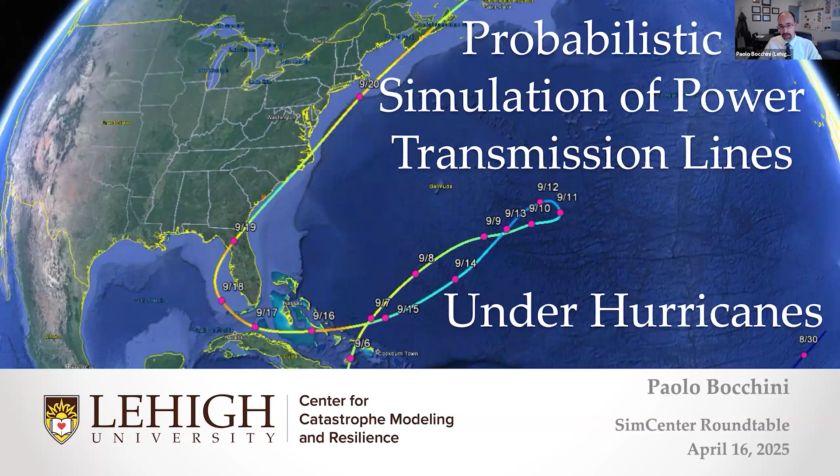Here, I try to combine some messages, like if we were giving a lecture, but condense it in 15 minutes. So I'll do my best, and I'll be a little superficial because I want mostly to go over some concepts than specific methodologies. So these are the main topics I want to cover today.

And I like to show this slide that gives a general idea of the approach that we have had for almost 10 years at this point, when we developed fragility and vulnerability models for this type of lifelines. The most important thing and the most important challenge, in my opinion, is to understand how you need to span a very large range of scales. For some of the structures involved in these problems, the bolted connections are really governing the dynamic behavior and need to be captured well.

So you need to start your study by looking at things that are in the scale of millimeters, a fraction of an inch, and then work your way up, always carrying all the important information with you and dropping everything that is not as relevant, all the way to studying the functionality of these systems that really makes sense when you have a model that spans hundreds of kilometers or hundreds of miles. So there are something like 8 orders of magnitude that you have to span in these models, as well as really different disciplines. You have to go from continuum mechanics to structural mechanics to system fragility analysis, and finally power system analysis.

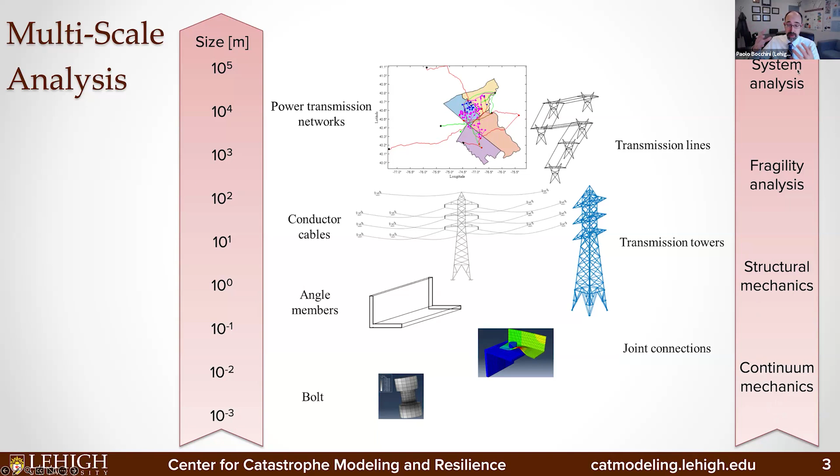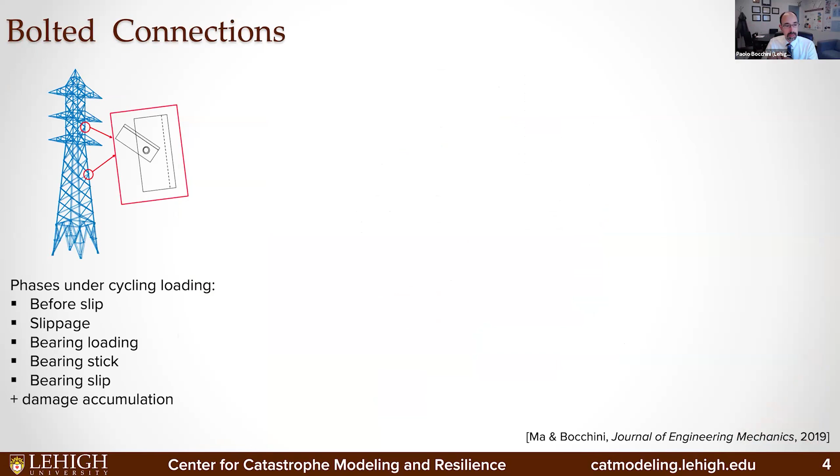So some examples, I like to start with our work on lattice steel towers. One of the big challenges, as I said, is to capture well the behavior of these bolted connections. And we had to work starting from experimental data to create 3-dimensional finite element models that could well represent the static and dynamic behavior of these bolts, and then go from those finite element models to simplified analytical models that we could eventually embed in an OpenSees element and put it into our tower models.

To tell you something funny, we had absolutely no idea that we had to do this when we started working on these towers. Our plan was to go directly to the tower model, and we realized that to really capture this, we had to start with this entire preliminary work that took something like 1 year.

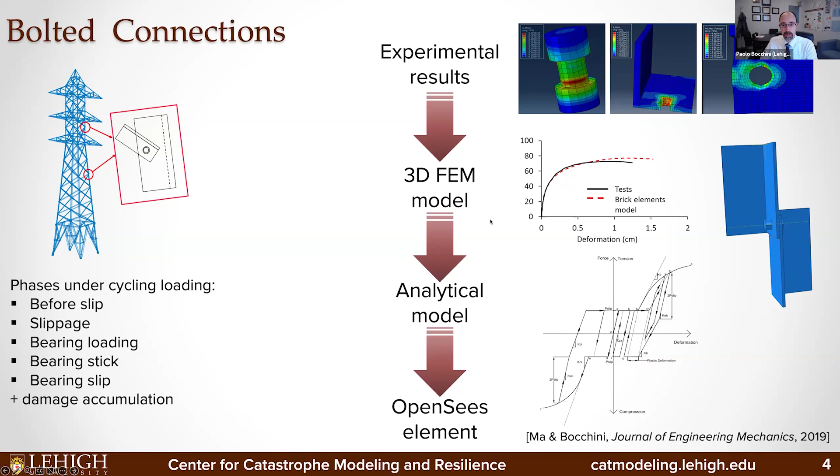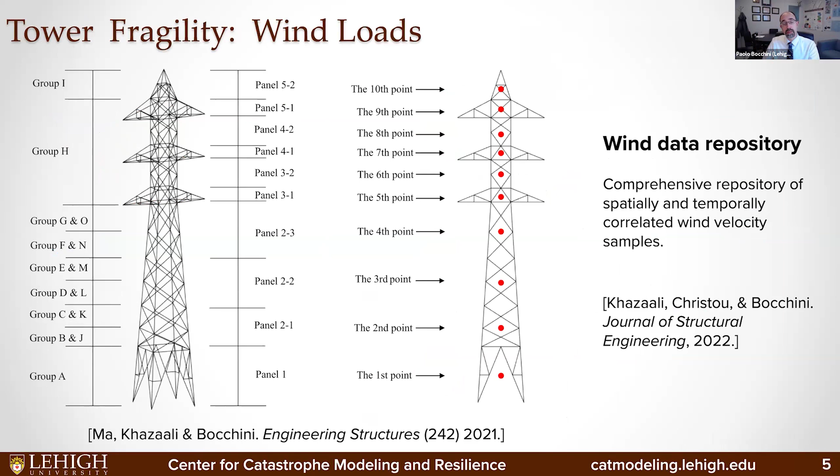Once you have the tower model, you need to apply your loads, and other students in our team had worked on the development of wind load time histories correlated along the height of tall, slender structures, and so we could leverage that work and apply direct wind loads to our towers. But then another issue arises, and it's what happens with the load transferred by the conductor cables. Of course, we could simulate all the loads applied to each point along the conductor cables, but that would generate an incredibly complex correlated set of loads that was really impractical to handle.

So instead of using this naive approach, we decided to study what happens if we could, in a way, linearize the problem. And of course, the idea of linearizing the dynamic of these cables seemed crazy at the beginning. But if we could linearize it and use modal superposition, then we could really calibrate a spectrum for the reactions of the cables to the attach points at the towers. And it turns out that if you choose the right point around which you do the linearization, you can actually do this with very, very high accuracy. So do first a preliminary mapping to a more convenient state, and then do the linearization.

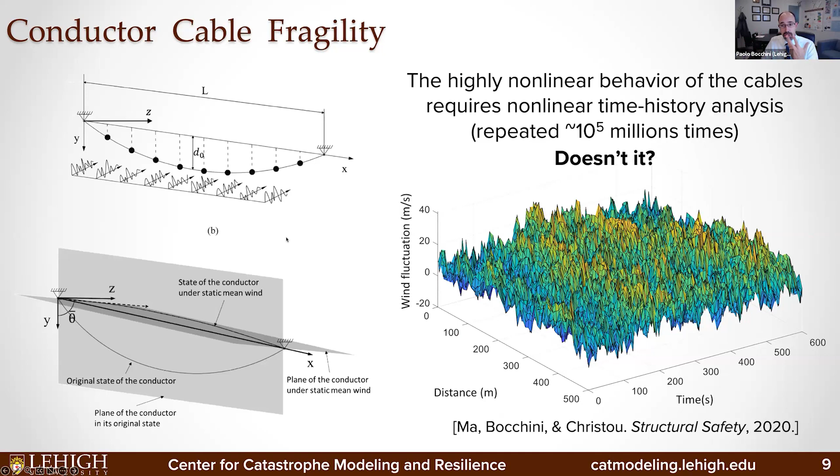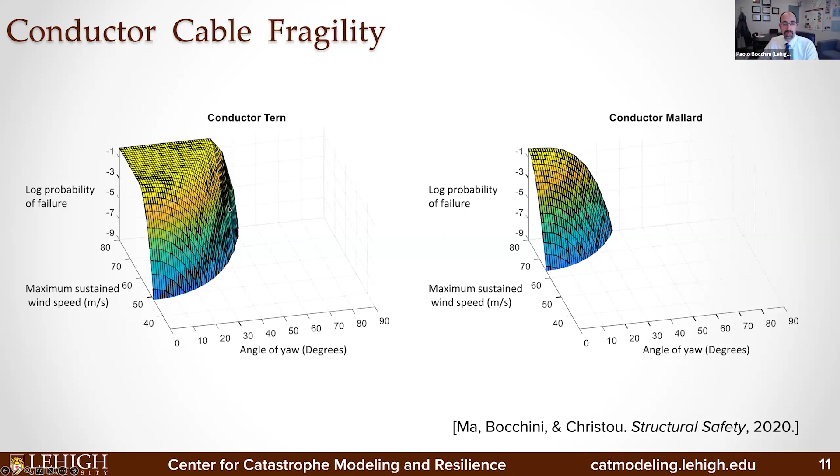Similar issues apply when you want to compute the fragility of the cables, for example. And again, here we wanted to check if it was possible to linearize this problem, and we figured that if you do it around a condition where the cable is already loaded by the mean wind, then the stiffness of the cable doesn't change very much. And so you can use a sort of modal superposition approach and still get very good results. So with that, we ended up with fragilities for the towers, fragilities for the cable as a function of the wind velocity and as a function of the angle of attack of the wind.

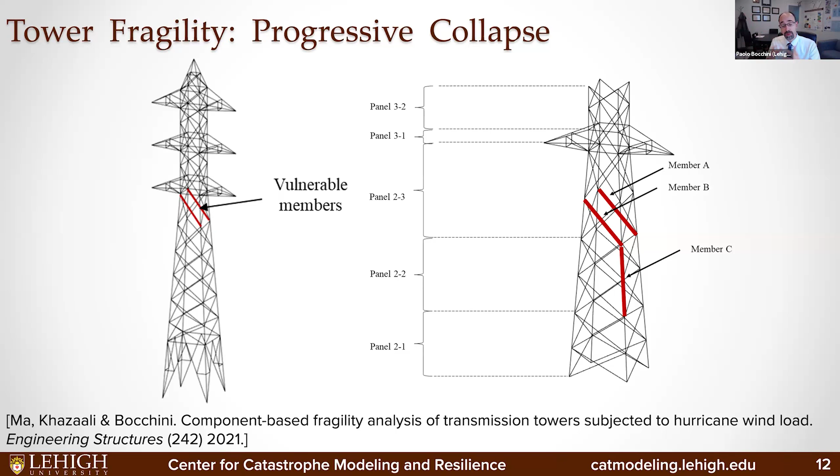For the towers, one element that is often neglected is to select the right engineering demand parameters to consider. The most common approach in this case is to study the tip displacement as a metric of the global behavior of these structures. But in reality, the failure of these structures is not really governed by their global behavior, but more by specific local buckling of some of these elements. So we quickly realized that we couldn't get good results just looking at the global deformation. We had to look at specific levels of stress in each element and then do a sort of progressive collapse analysis to study the fragility of these towers.

We also looked into transmission monopoles, so other types of transmission line support structures. We started by calibrating fragilities using the most common approaches in the literature that are based on the assumption that the highest bending moment occurs at the base of these structures. And so you can do effectively a static equivalent analysis, compute the capacity of these poles at the base, and apply the equivalent bending moment coming from the hurricane wind. And we ended up computing fragilities with these assumptions for different classes of these poles, etc.

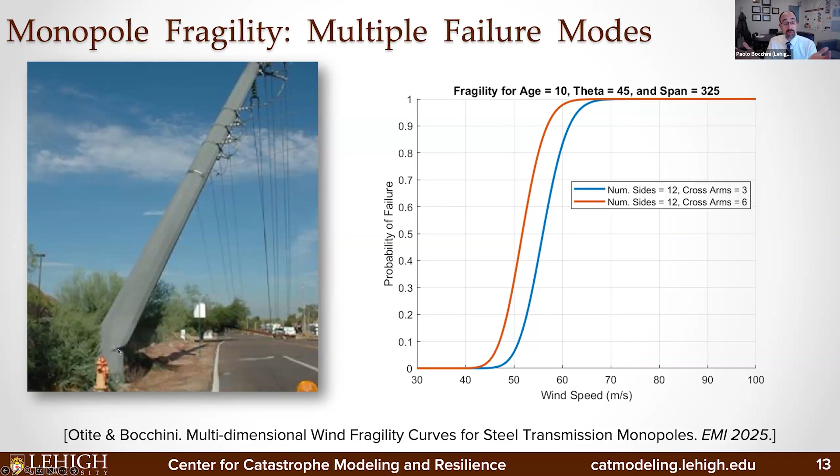But then we noticed that the assumption that I just mentioned of failure at the base works very well for distribution poles, but it doesn't work as well when you're dealing with bigger structures used in the transmission lines. Unfortunately, there are a lot of failures, probably more than those occurring at the base, that happen midway through the height of the tower. And as many of you perhaps have already guessed, this is due to the fact that the second mode of vibration tends to excite and generate bending moments that are higher around the middle of the height of the tower. And especially considering the fact that they are typically tapered and there are additional connections that can exacerbate the loads at some locations, these end up being the most critical cross sections. And so we're creating now a new set of fragilities that includes also these possible types of failures.

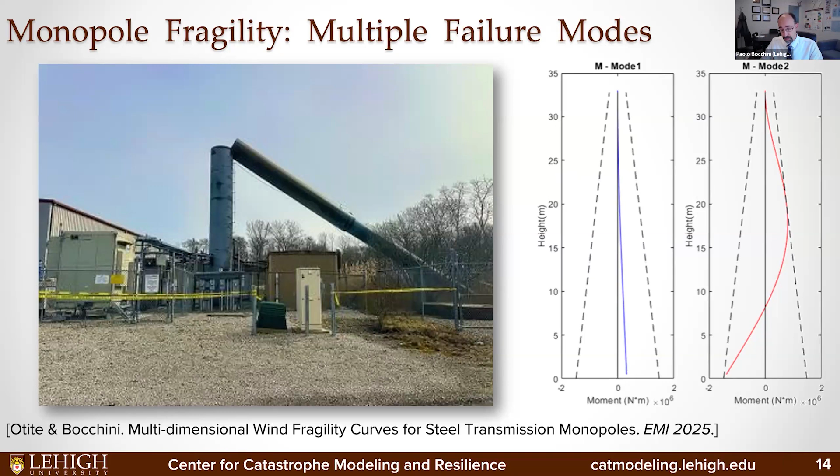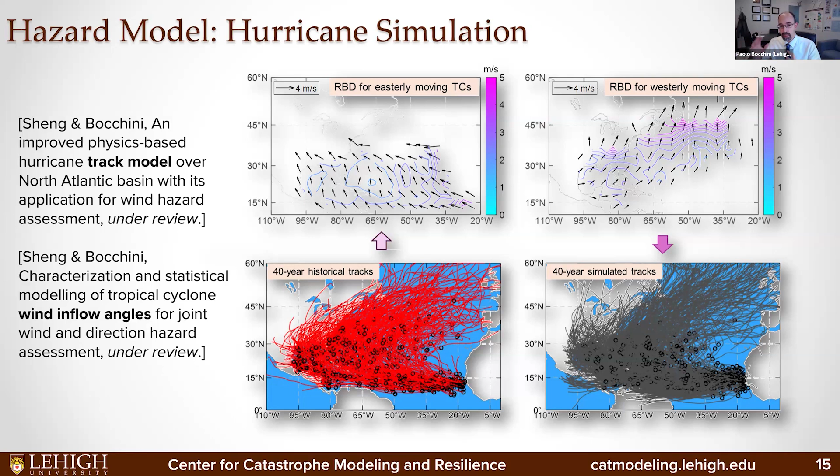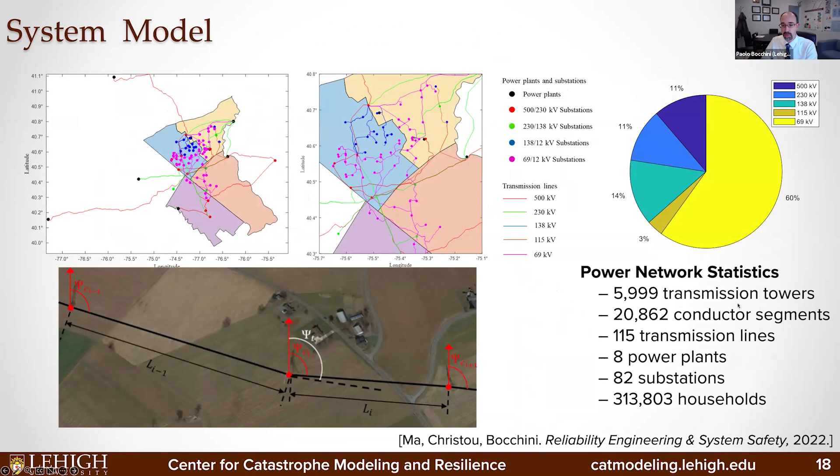Very briefly, where do we use all of these different structural fragilities? Well, we use them for entire analysis, as I hinted at in the first slide. We have hurricane simulation models that give us tracks and wind fields over time. And we have a highly detailed model of some transmission lines, knowing exactly the direction, the location, and the connectivity for something like 6,000 transmission towers and a lot of conductor segments. And we put all of this in this general framework to eventually calculate the probability of failure of each of these towers.

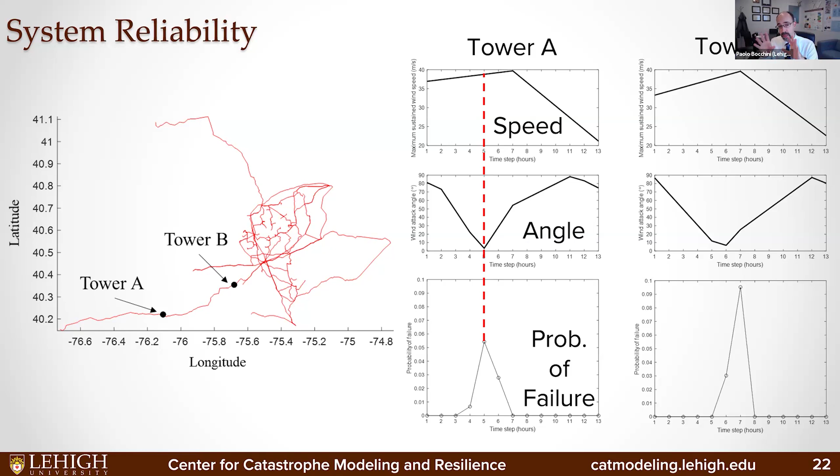But also in this case, I will bring up another crucial challenge, that is the necessity to decouple the uncertainties that come from the load and those that are proper to the structure. When you are simulating an event with a certain duration in time, like a hurricane, you want to sample your structure only once at the beginning of the hurricane and keep all those properties constant through the passage of the hurricane, whereas you want to sample the variability in the load all over the duration of the event. So this is against the traditional way in which fragility curves are built, right? Normally we put together uncertainty in the load and in the structure, and we create a fragility that gives us a combined probability of failure. So we had to find a way to decouple these two different sources of uncertainty for this specific class of simulations. I will not go into the details, but I'll be happy to point to some references.

As a result, we can compute the probability of failure of every transmission line. We can compute the overall ability of this network to deliver power to their users. And we can also include the recovery models to show how the unmet demand evolves over time.

So the second question is, do we really need all of these advanced models? Because the truth is we have a good number of fragilities that are available in the literature. We know they're approximate, they make a lot of assumptions, but does it make a difference when we study the overall system performance? So I have another student who started looking specifically into this type of problems. I'm very happy to see that there is more awareness for these meta questions in the community. We started asking these questions about 10 years ago. I've seen now students dedicating an entire PhD dissertation, for example, at Rice University, to address this type of questions.

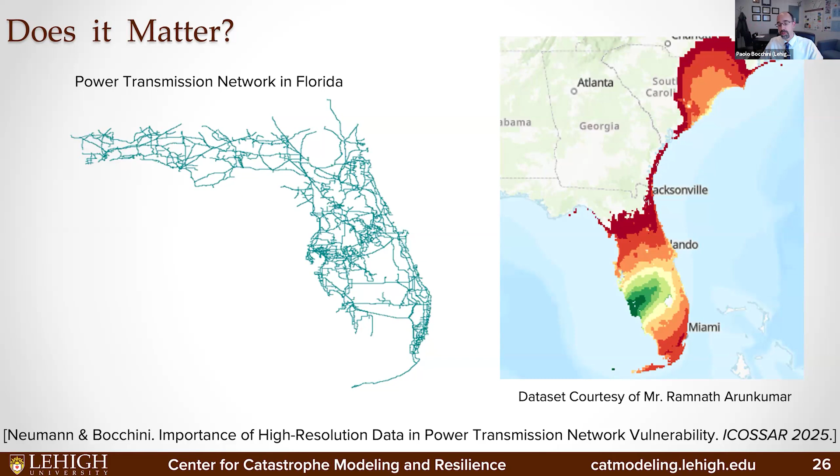So what this student did was studying the power transmission network in Florida and do a series of sensitivity analyses studying a lot of different conditions. Here, I will show only two comparative studies.

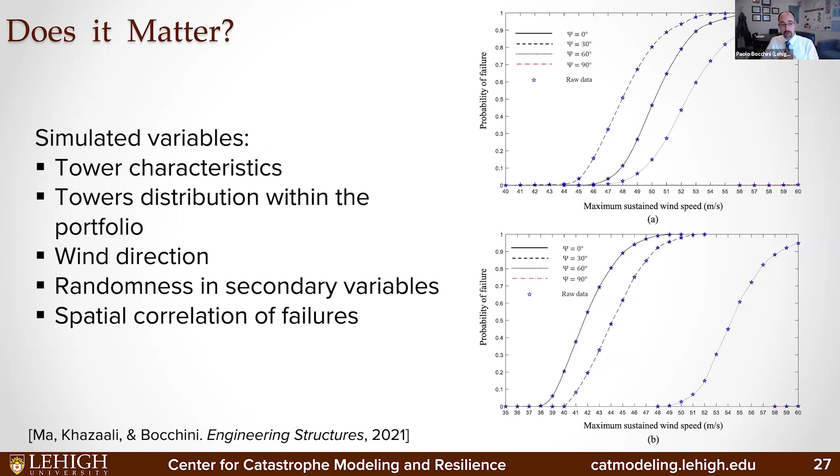The variables that we have included are things like the tower characteristics, the specific distribution of the towers within the portfolio, the wind direction, randomness in secondary variables of the tower and of the load, and spatial correlation of failures. So the first result that I will show you is this one, where we were keeping most things constant and changing the percentages of two archetype towers.

So in this case, the distribution of the towers in the network is kept constant. There is only one map for each one of these cases, but we're changing the percentage of towers of type A that ends up being a little bit stronger. And you see that we have a very substantial shift in the distribution of the functionality at the end of the event. Now, consider that we're looking at the functionality of the entire state, but the event really hit only a portion. So a variation of something like 5-6 percentage points is a huge variation for that particular area.

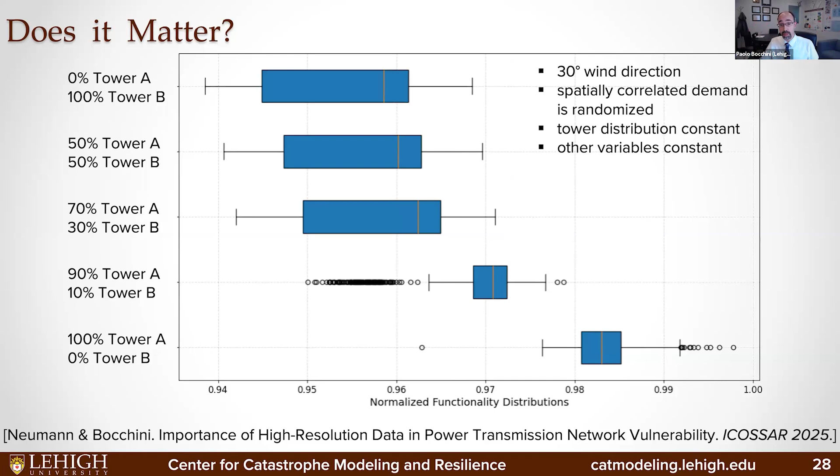So this conclusion leads to the third and final part of the talk, that is the fact that we have to look for surrogate models that can capture this variability, but don't require us to know specifically the properties of each tower, that are parametrized class fragility models. Now, models of this kind have been around for a very long time. They mostly started with the study of bridges.

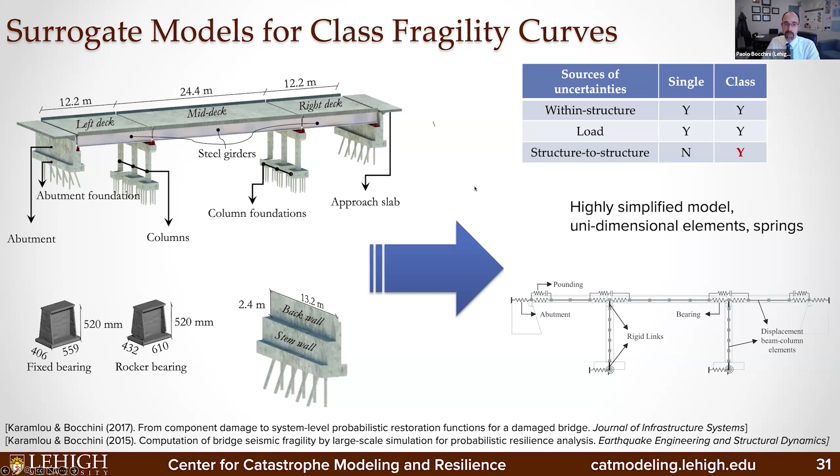And I think that one crucial step that was done at the time was to be able to simplify a very complex structure like a bridge into a series of very simple elements that could capture entire blocks of this structure. Nothing like that was done in general for transmission towers, right? The fact that towers tend to be a little bit simpler led to the conclusion that we could model each one of these elements.

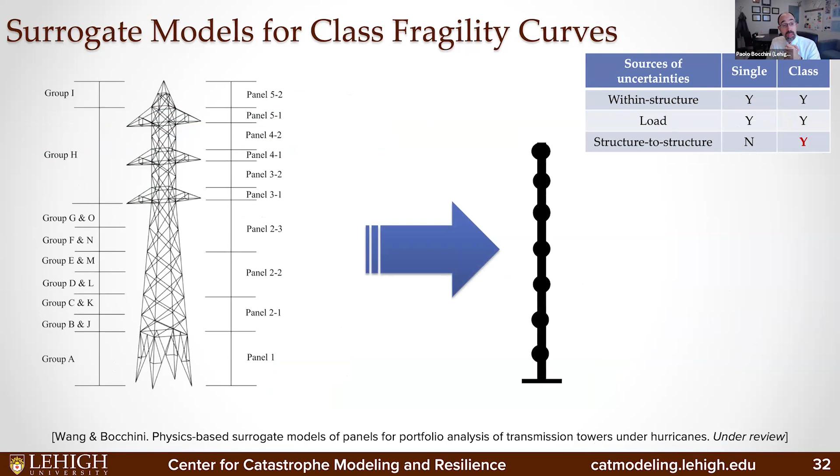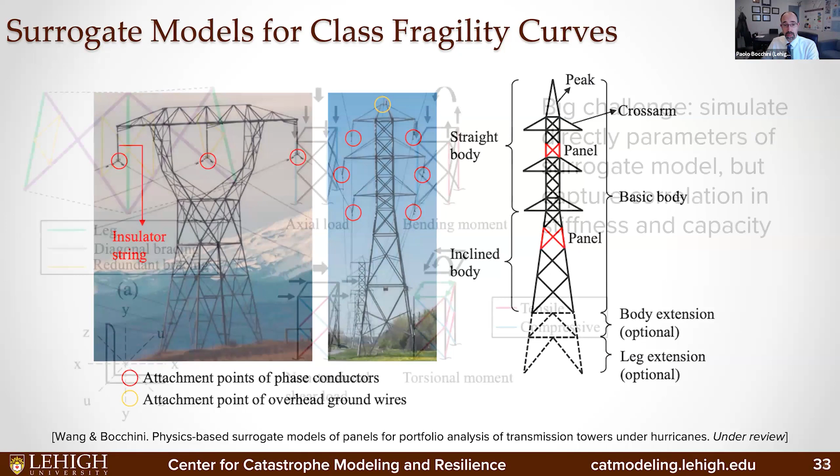But that's not true if you want to capture this structure-to-structure variability that you have in classes. So a few years ago, one of my students set out to do a similar transition and calibrate models where, in this case, the unit for these models is the panel of each one of these structures, so that we could create surrogates that could capture entire classes of these support systems. Now, I'm running out of time, so I will not go into all the details of how to create true mechanical equivalence for these surrogate models.

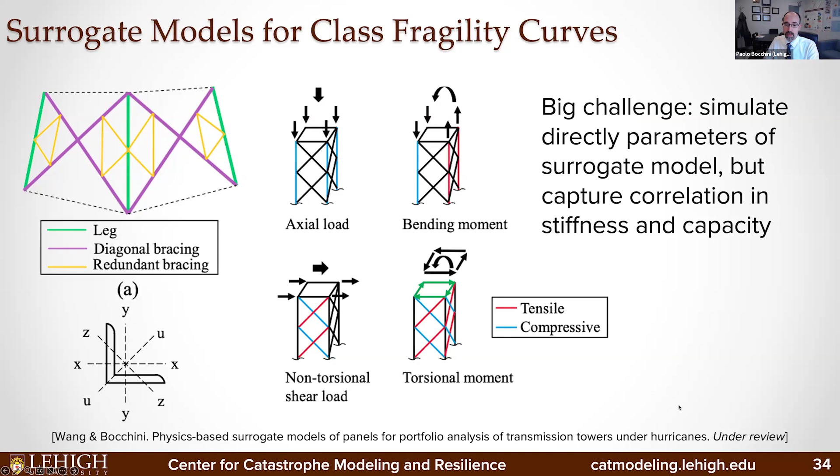I will just point out the fact that one of the biggest challenges was to be able to capture in a way that is coherent the stiffness provided by a specific sample of a panel and the capacity associated with that specific sample. We want to sample not the original characteristics of the structure, because that would defeat the purpose. We want to sample directly the characteristics of the surrogate, but we want to do it in a way that preserves the correlation between stiffness and capacity. And that requires a good amount of thought. Now, these results have been submitted in papers. We will present a number of them at the EMI and ICOSSAR conferences this summer.

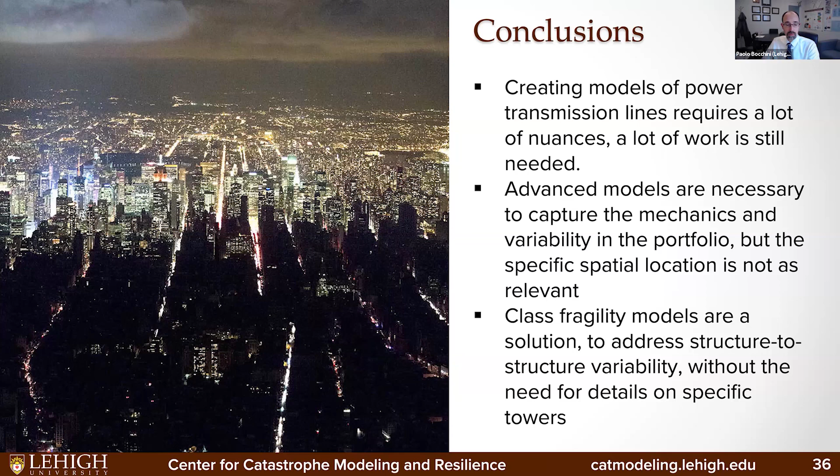I would just draw a few conclusions. First of all, creating models of power transmission lines requires a lot of nuances and a lot of advanced work on these models is still needed. There are a number of groups around the world doing this, and I do believe it's very important that we refine our models. It's important also to understand that this refinement is not perhaps needed to capture each individual structure, but it is important that we capture the variability within a portfolio of these structures. And the possible solution to do this, the one that we recommend, is the use of class fragility functions for these systems. Thank you so much.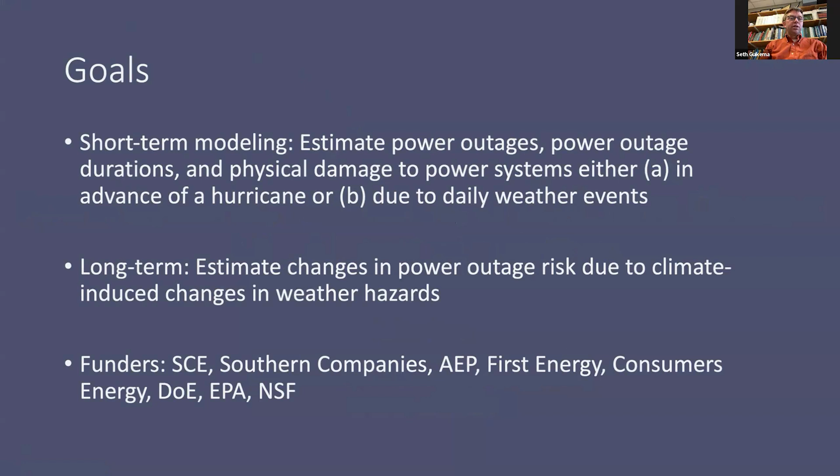So one thing that we have been working on for 20-ish years is power outage forecasting for utilities. So this is developing models to predict how bad an incoming weather event is going to be in terms of outages, both spatially where it's going to be, how many total outages. And these are operational models that a bunch of different large utilities have put into practice. They run every 6 hours so they can get their estimates of crew needs, essentially, and to some extent materials, so they can better plan their response.

So when we think about this sort of modeling, we have to understand the decision context. I started off working on hurricanes, so I'm going to give that example, though we now work on all weather events. So for a hurricane, when a utility sees a hurricane on the horizon, 4 to 6 days ahead of time, that forecast becomes credible. They have some decision to make, and their big decision is crews.

A large utility can spend $20 million a day on crews during their restoration. This is their really expensive decision. So somehow we have to get them information about how much damage there's going to be, how many outages there's going to be, so they can start planning these crew requests. So next slide. So on the short term, our goal is to get estimates of power outages 4 to 6 days before landfall.

And even in a hurricane, most of the outages are in the distribution system, not the transmission system. So we need to figure out how do we model a distribution system, which is not maintained to nearly the same standard as a transmission system. The tree setbacks aren't as big, and a lot of the outages are due to trees impinging on lines and to some extent poles. So we took a different approach, and we've developed, next slide, predictive models where we use data from the utility and a lot of different spatial information.

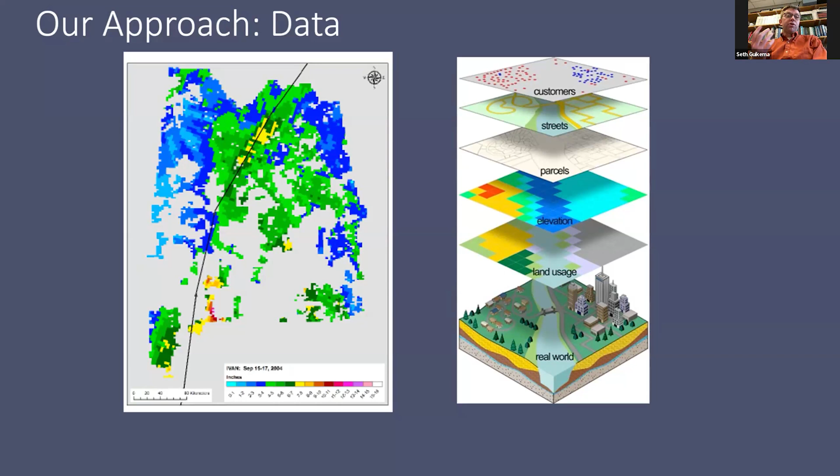So next slide. So at a high level, I'm going to give the hurricane example here. We get data from historic hurricanes and what happened in their system in terms of number of outages, number of broken poles, number of broken cross arms, spans down, underground runs that need to be repaired. We get all of this data together with all these other covariates, and we train statistical or machine learning models to then try to estimate what's going to happen in a new event.

For a hurricane, we run our own hurricane wind field model. So we ingest the track intensity forecast, run a hurricane wind field model, and then we use that to train the model. When we go to make a prediction for a new storm, that's pretty fast, right? We can do the entire East Coast in about 5 minutes on a laptop. So most of the effort comes in this training testing portion. So this is, in a sense, a simulation problem because of the nature of the holdout testing. Next slide.

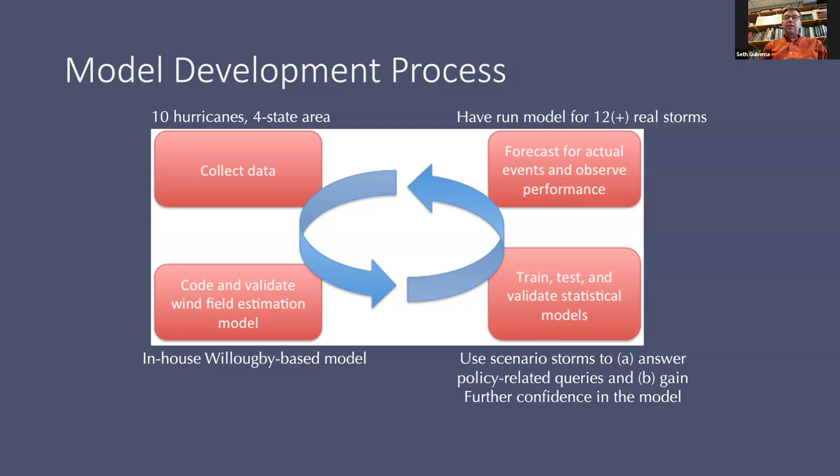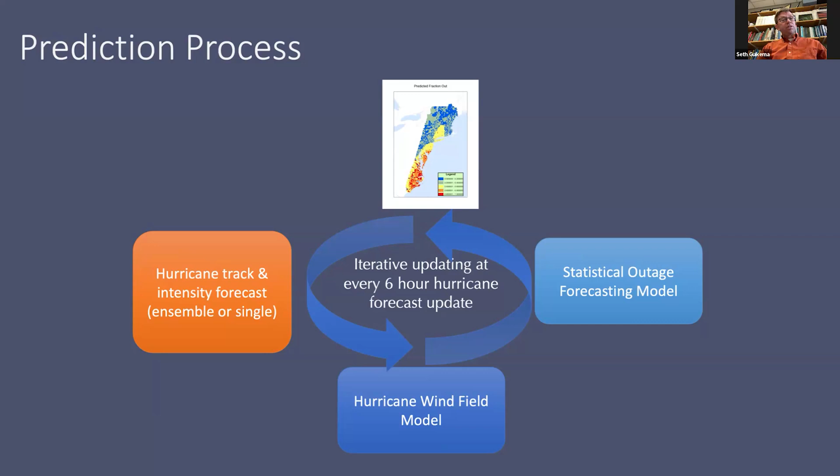Okay, to do a forecast, we ingest the hurricane forecast. It might be a single track, it might be a full ensemble. We've done the full ensemble from National Hurricane Center and other places. For each one of those ensemble members, we run the wind field model. We then use the statistical model to estimate outages at the grid cell or census tract, whatever version of that model we're running. And that gives us then either a single estimate or an ensemble of impact estimates.

So next slide. This is one older one. This was with a utility. They didn't want us to show a map of where they were. You can guess. On the left is Hurricane Ivan. That's the actual outage map. And an outage here is a non-transitory activation of a protective device. So it's someplace they have to send a crew to do a repair.

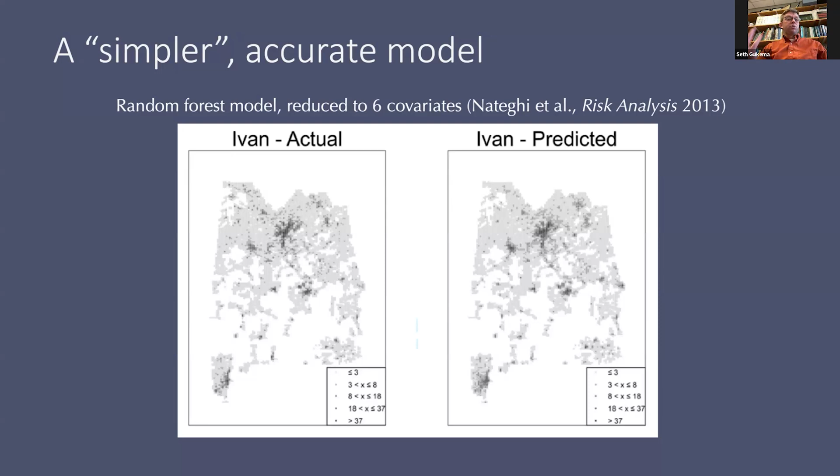It might affect one house. It might affect 200 houses. This isn't the customer model. We have other customer models. So on the left is actuals. On the right, when we go back afterwards and use best tracks, we eliminate the track uncertainty and then run the model. And we get pretty close that the overall error is pretty small and the spatial error is pretty small.

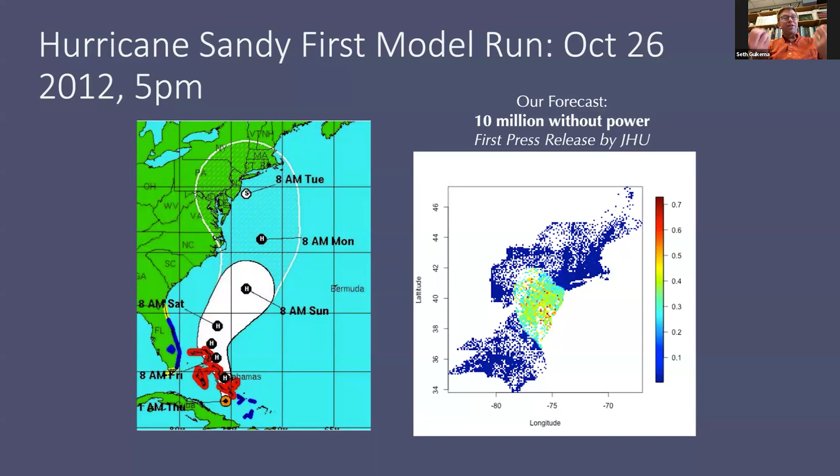And this led to an awful lot of media interviews. I think I did like 65 in a week and a half, some of them live. And if you haven't trained for that, that's an interesting process to go through. So if you're a grad student listening to this, I would say, think about how you're going to talk to the media if you're in this space.

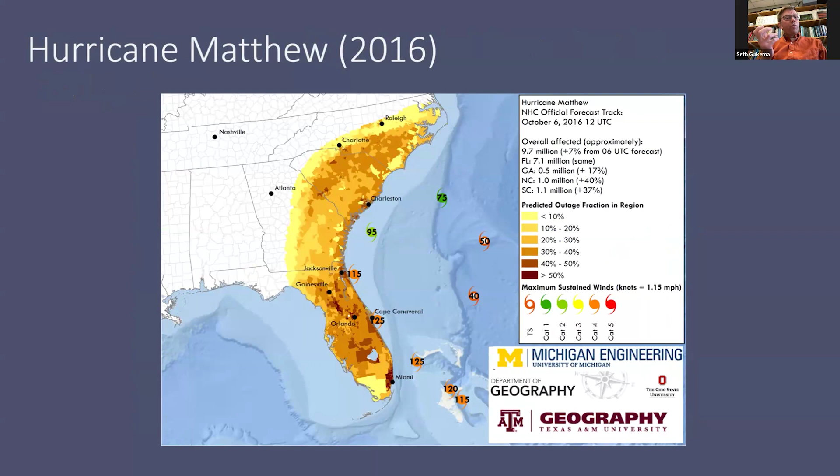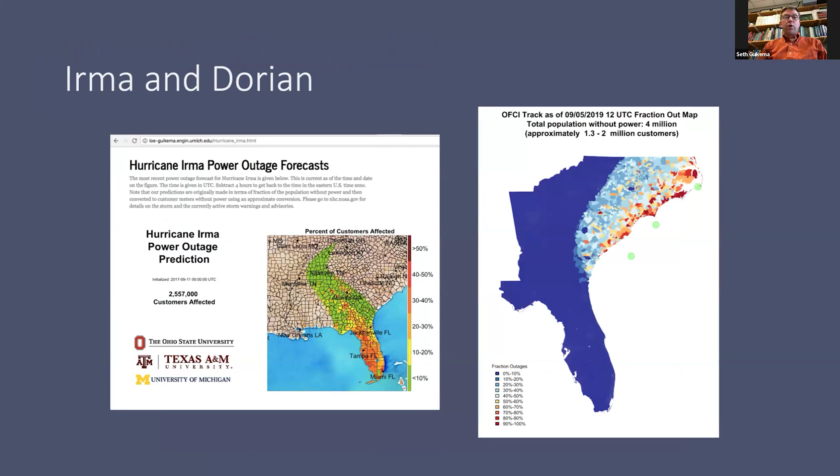Next slide. So that was all short-term outage forecast. Storm is coming, do a prediction. We've now done that for winter storms, thunderstorms, all-weather models, West Coast, center of the country, a little bit of East Coast. So we've got a lot of different models there, but that's all short-term. We wanted to ask the question, how can we then estimate long-term risk? And this is where it really gets into simulation. So next slide.

So when we think about tropical cyclones, again, we're going to talk tropical cyclones here. They cause massive amounts of damage, of course, right? We see these sort of pictures emerging from a lot of these post-events. In looking more broadly at power systems in the US, depending on which data set or which references you look at, somewhere between 78 and 86% of power outages in the US are caused by weather. The majority of that is in the distribution system, because that's the particularly vulnerable portion of the system, particularly for wind events. So next slide.

Just click through the next two. I was going to click these. Okay, and well, there you go.

So we wanted to look at how might power outage risk change in the future due to changes in hurricanes in a changing climate, right? So there are estimates of how hurricane frequency and intensity may change in the future. There's a lot of different estimates in the literature. Downscaling and generating hurricanes in a future climate is challenging. We'll talk a little bit about that.

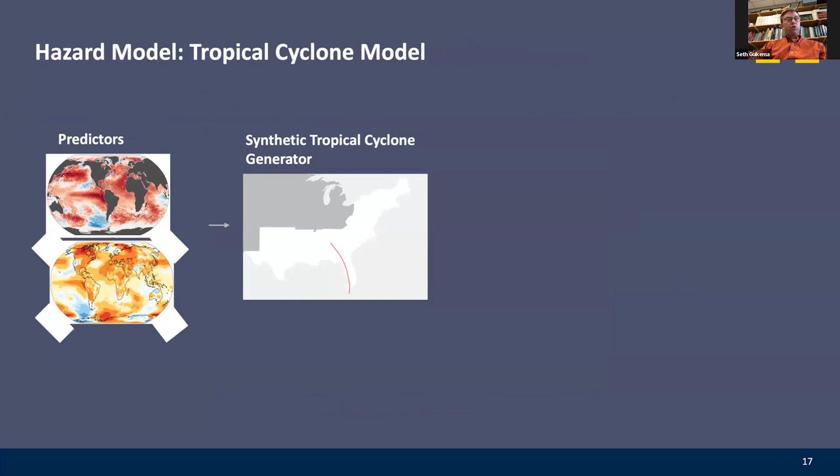Okay, so first, we have to somehow generate synthetic tropical cyclones. We teamed up with Kerry Emanuel, who developed a synthetic tropical cyclone generator under different future conditions. So we took a bunch of different climate models. For each one, we generated 2,000 hindcast storms and 2,000 storms in a projected future at a particular point in time under that climate scenario.

Okay, so we have a bunch of different predictors that then we use to generate each storm. So now we generate 28,000 hurricanes that make landfall. So this is 28,000 landfalling hurricanes. For each one, now we run a wind field model, and then we run our power outage model, and we estimate the number of outages and the duration of those outages.

So this becomes a large-scale stochastic simulation, because we're going to generate 28,000 hurricanes. For each one, we're going to generate a wind field, and then we're going to generate a power outage map, and then we're going to do some other analysis with it. So next slide.

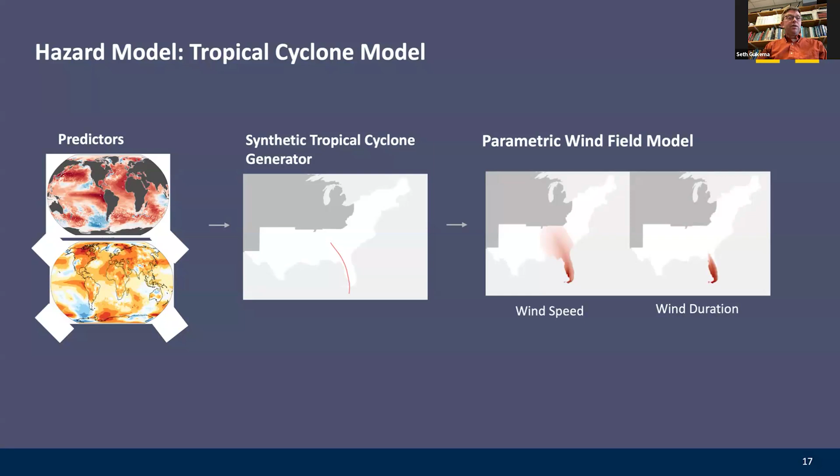The power outage model we used here is a two-step random forest. So first, and this was based on our short-term work, figuring out what sorts of models actually work well to predict outages. So first stage, we predict, are there outages or not? Second stage, for those that were predicted to have some outages, then we predict how many.

Because part of the problem is, even with a hurricane, it's zero inflated, that we have a lot of areas that don't have outages, so we need to account for that. So again, multiple papers on this if you want to get technical details, or I'm happy to answer questions. Next slide. Okay, so let's look at results. I'm going to go straight to results.

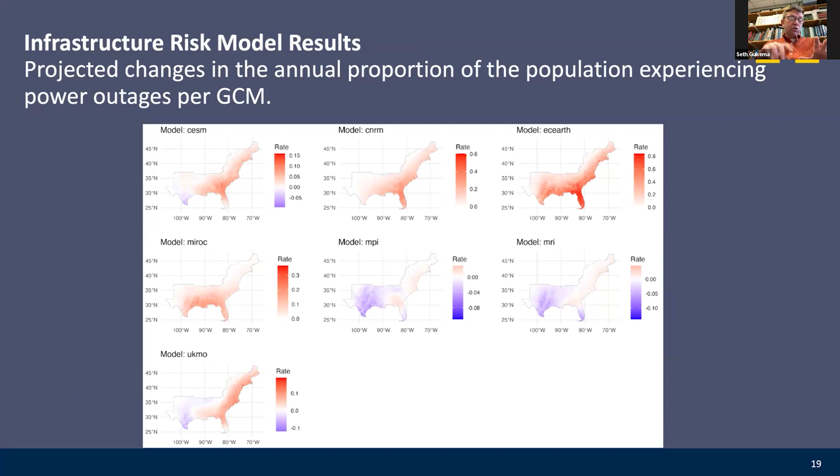These are these climate models we ran. So we have 7 different climate models. And for each one, we look at the difference between hindcast and projected, and then we map that difference. So where things are blue, we have less frequent outages. Where things are red, we see more frequent outages. So go to the next slide, and that'll summarize it maybe better.

So once we do this simulation process, then we can start to get some sense of how this is going to look. The rest of this work is then asking, okay, who lives in these areas? Who's more likely to see big increases versus not? Which subpopulations? And there's some interesting trends there that we can talk about later.

Next slide. So at a really high level, I was trying to boil it down to just the simulation component of this, right? That if we're going to try to do long-term estimation of changes in risk, we kind of have to do simulation. But we really need to ground this simulation on strong data and deep collaboration and integration with power utilities, because they're the ones that know this system.

So I go back to that early slide and said, this work, a lot of it was funded by the power utilities, and we got an immense amount of data from the utilities. And that's, to me, the key thing to making this all work.

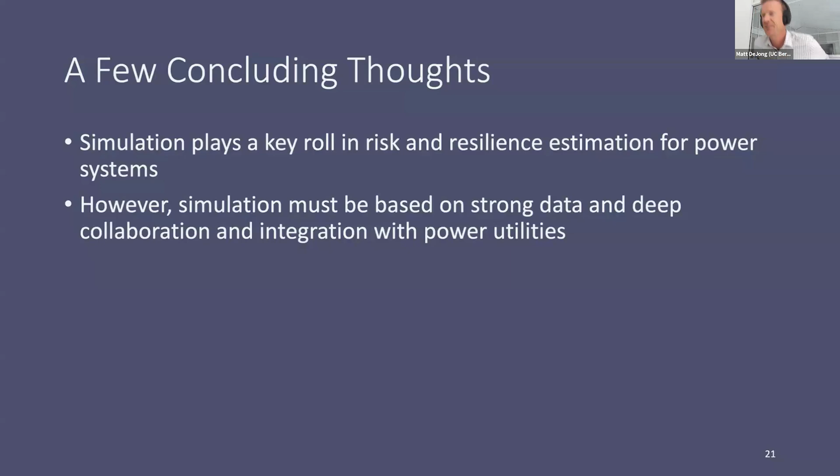So we've had two presentations mainly focused on wind or hurricane events, and so we're going to change gears a little bit and now focus on resilience of power networks under earthquakes for our last two presentations. So the next speaker is Ken Hudnut.

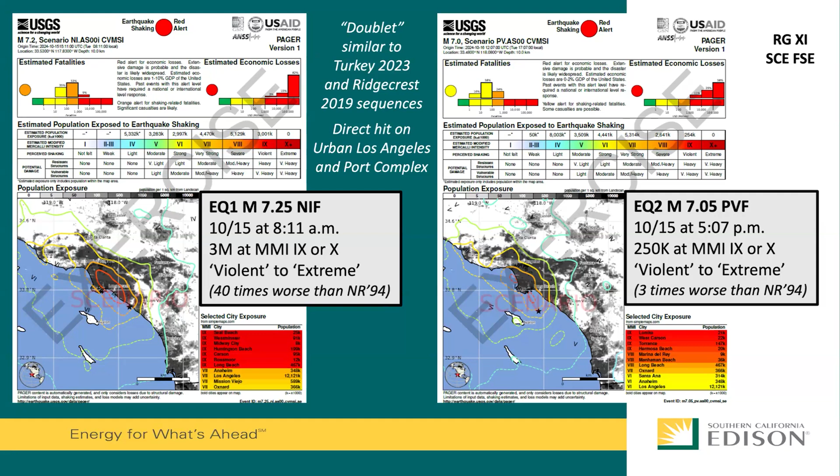But let me start with our mission, which is to provide both seismic safety and reliability of the power grid. So we're trying to provide safety not only for our personnel that are working in our buildings, but also the public that are visiting in our buildings. So building safety is a big part of it. But then also we're looking beyond that. Technically, in terms of our calculations of risk and efficiencies, we have limitations put on how we do those calculations. But we also recognize that there are indirect impacts.

So if we can reduce the duration of outage from a big earthquake, that's going to have widespread effects downstream, because so many other utilities and infrastructure systems rely on electrical power. So we certainly recognize that. We may not be allowed to use that in our calculations that are how we argue for our rate case increases and so forth, but we certainly recognize it, and we have calculated, of course, and there are huge benefits, needless to say, if we can keep the grid up and running and if we can restore it quickly. So we're always trying to reduce the duration of widespread outage. Where that comes in is in a quantity called customer minutes interruption.

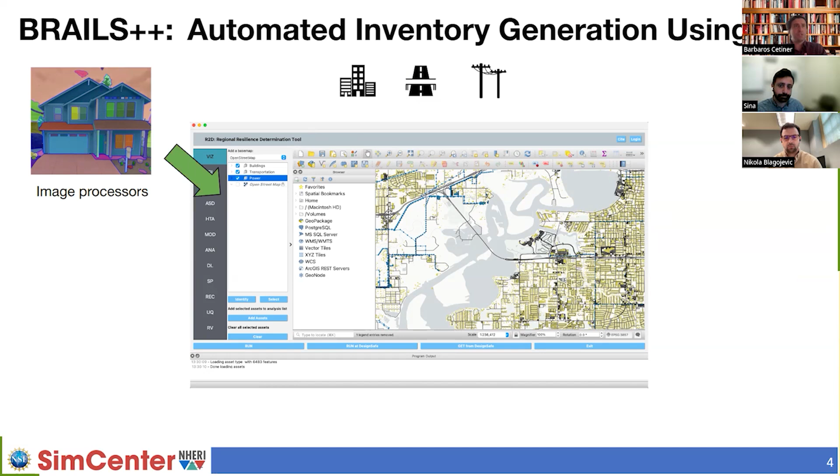It obtains attributes of the built environment from images. This is for the situations where we don't have databases of certain attributes that are essential for natural hazard studies. If we're talking about buildings, it would be something like first floor elevation. If we're talking about transportation networks, the physical locations of where the components will be. BRAILS has capabilities to extract attributes from images.

In addition to these capabilities, BRAILS also can scrape data from basically openly available data sets, some of which I'll talk about in a second, and puts them in a form that is meaningful for natural hazard studies. So it's not the raw data that you can find in a data set, but it's in a form that's meaningful for, say, damage and loss analyses.

And whenever BRAILS cannot extract data using these two approaches, it can also use statistical imputation to fill gaps in inventories based on data known for other locations. And finally, BRAILS also has rule sets, which we call inference engines, built into it, that can predict unknown attributes based on a number of known attributes. So this is kind of the statistical imputation approach, but it's more grounded on rule sets that are developed based on experience or prevalent practices.

And one thing that's also important to mention is BRAILS++ is developed by SimCenter, but it's slowly getting to a point where models from other researchers are making their way into BRAILS++. One of the recent ones that we've actually integrated in BRAILS++ is the first floor elevation model that was built by a research group in University of Florida. So if you have a model that you're interested in sharing with the community that's meaningful for natural hazard studies, BRAILS does provide a platform to do so.

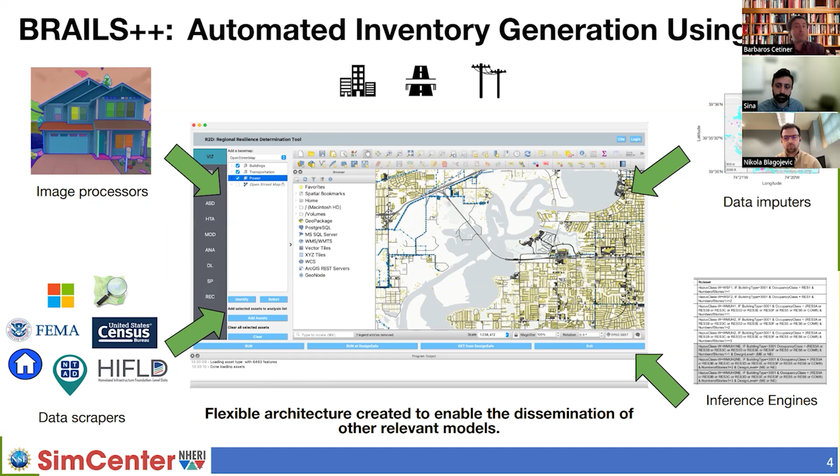In terms of the public data sets that are currently integrated into BRAILS, you're seeing basically all sorts of data sets that are available for all supported assets right now. But in terms of power infrastructure, there's two primary data sets that you can use to create inventories of the power networks. The HIFLD data set, which is primarily for the US, is a federal data set that's openly available. BRAILS takes that and parses it into a form that's meaningful for damage and loss analyses. And the other data set is available on a more global scale. That's the OpenStreetMap data.

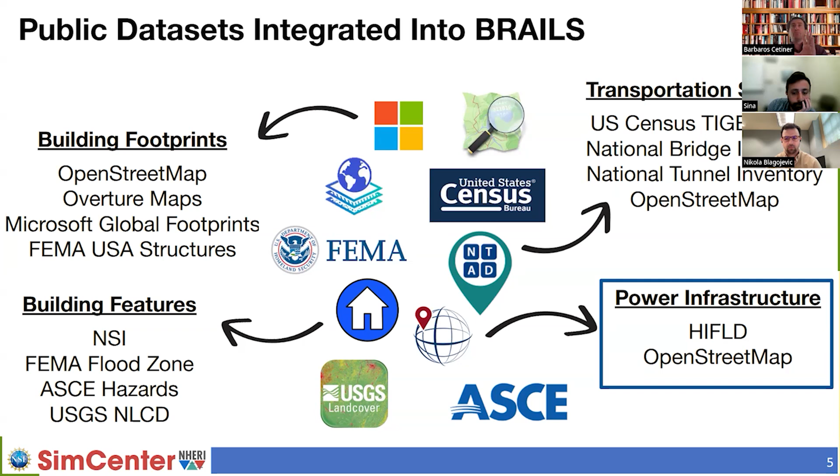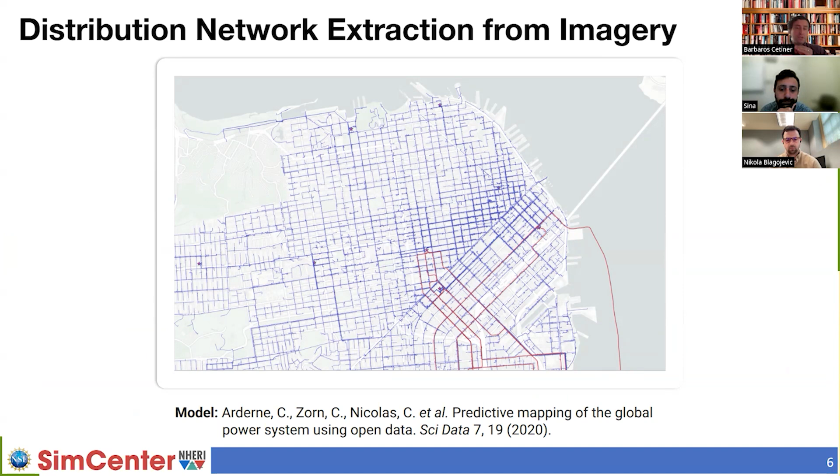At the beginning of the presentation, I shared QR codes for how to access these tools. In terms of how you can use BRAILS++, you really have two options. It's either a Python command line interface, and the QR code will get you to the GitHub repo for that. And BRAILS++ is also built into the R2D tool for a seamless integration into damage and loss analyses. So those are the two options you have for accessing BRAILS++.

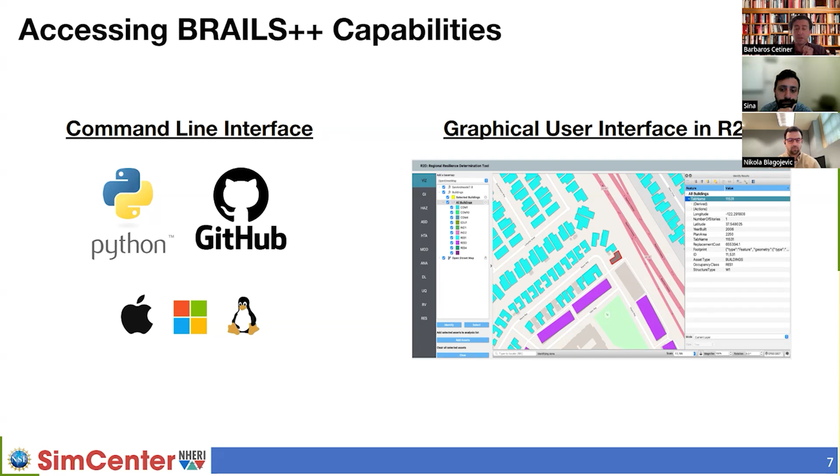After that, we had the asset inventory generated by BRAILS for the power distribution network. It was a chance that we had to integrate the damage and loss modeling of these assets into R2D. So that's what we did using the HAZUS methodology. Next slide, please.

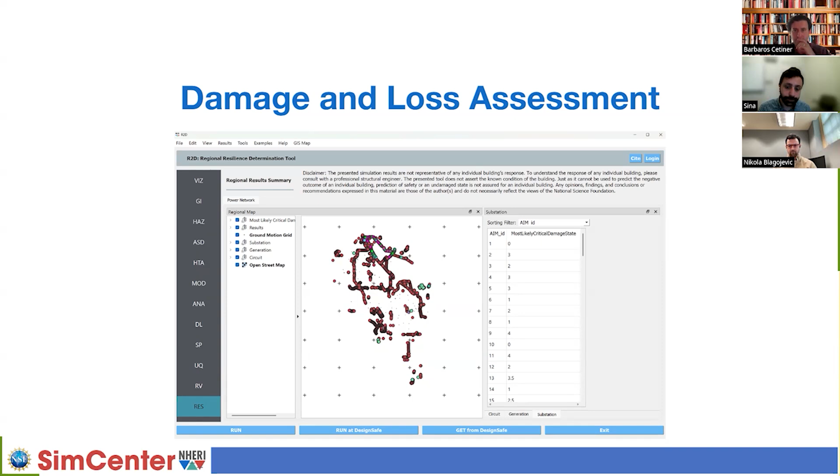In order to have the seismic damage and loss assessment for the power system in R2D, we used the HAZUS methodology. For that, BRAILS is developed to produce the power inventory assets according to the archetypes that we have in HAZUS. Those are generations, substations, and circuits. Generations are basically the power plants that we have in the power network. They produce the power. Circuits are basically whatever assets help to bring the electrical power from the generations, from the power plants, to the users.

And then substations are the facilities that modulate the power in order to bring the voltage down or up, and also to distribute the power into a neighborhood or to a significantly large user. These archetypes are defined by HAZUS, and BRAILS can produce an asset inventory generated based on these archetypes, and other specific parameters that are needed according to HAZUS are either actually produced by BRAILS or assumed inside R2D.

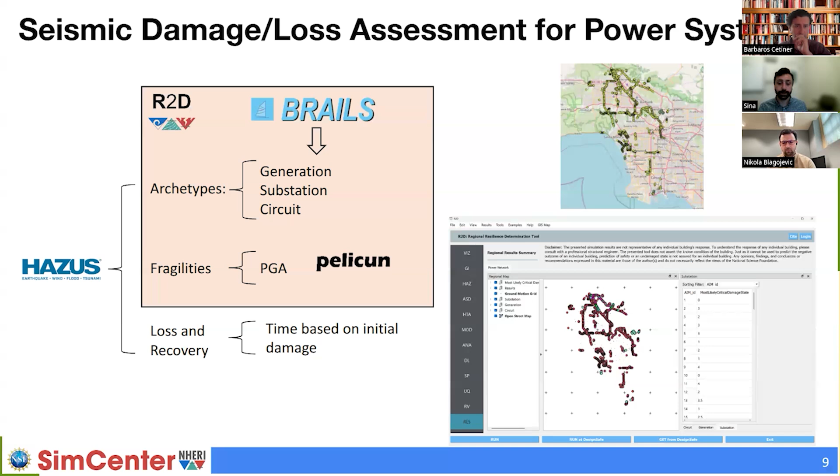And then we need fragilities that estimate the probability of damages. These are in HAZUS based on PGA, and that is right now integrated into Pelicun. Pelicun is right now more than capable of doing that, and these are what we have right now in R2D. However, after that, we have loss and recovery in HAZUS, which is based on time and initial damages. We have not integrated that in R2D because we actually have something better than that, and we are going to talk about that on the next slide. And for that I have to pass it to Nikola.

Thank you, Sina. So once we have the inventory generated by BRAILS and we have the damage assessed by R2D, then we can simulate recovery from this damage. And this is what I'll be talking about in the next couple of slides. Next one, please. So the reason we're talking about recovery is that we want our systems to be resilient to natural hazards. And when we talk about resilience, basically we're talking about the ability of a system to quickly regain functionality following a certain disruption.

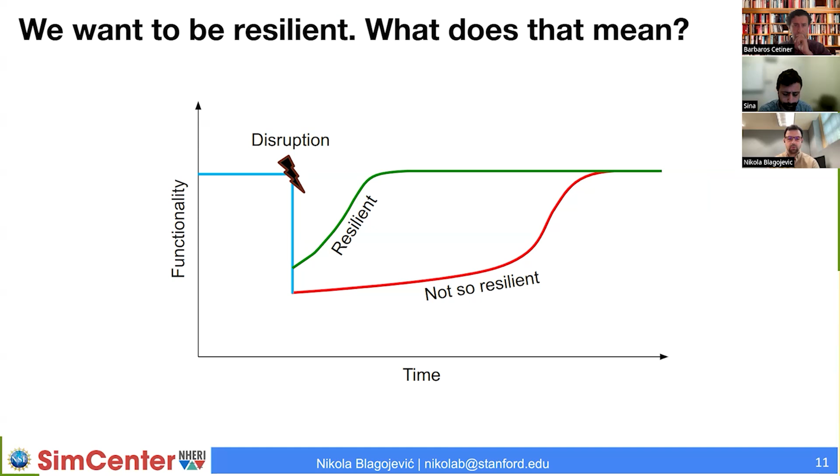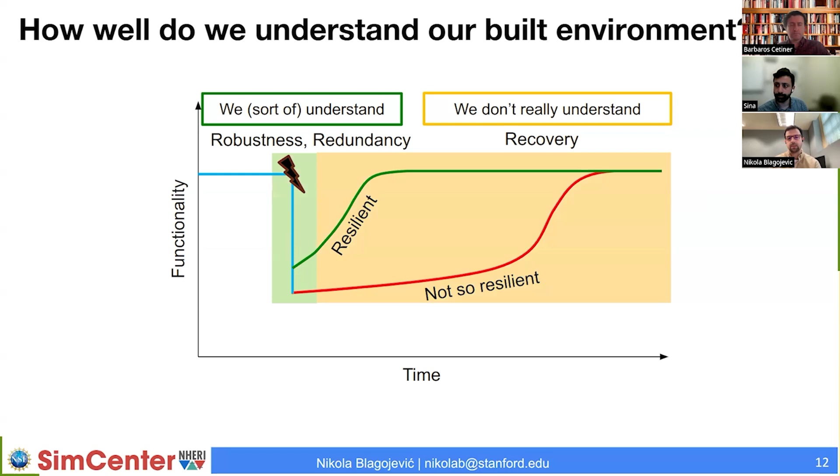Next slide, please. What we have been focusing on in engineering for the last decades has been making our systems robust and redundant. And most of our tools are focused on this first drop in functionality. This is something that we can assess. The problem is when we want to simulate recovery from this damage. For that task, we need new tools, and a lot of our research was devoted to developing these tools that can simulate recovery from damage. There are two main issues with recovery. Recovery has to be considered on a regional scale, and it has to include interdependencies between different systems that are recovering simultaneously. Next slide, please.

So when a disaster hits, a lot of our components get damaged, and the way these components interact changes. As these components are recovering, interdependencies between them are slowly restored, and they can also change over time. So that's why it's also important to understand that these interdependencies are dynamic, and we need models that can capture this dynamics in how components interact as they're being recovered between different systems.

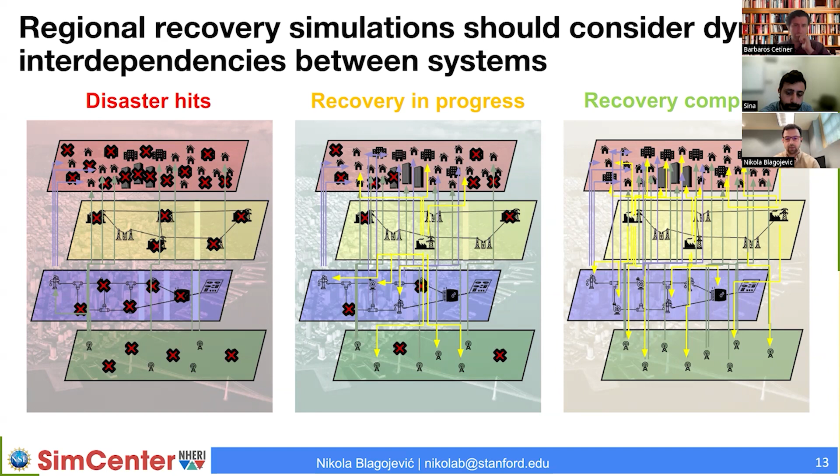Next slide, please. So the first thing that we need to start with is simulating the recovery of individual components. And the most basic recovery model for a component, let's say a building or a substation or a pipe or a road, will be the one offered by Hazus. This is a single parameter model where the whole recovery is characterized by a single number, the recovery time. And the benefits of this model is that it's simple, but it's also region specific because it's based on past data, and it provides us limited insights.

We cannot really understand how we can reduce this recovery time beyond just reducing the damage that this component is exposed to. What we can do with more advanced recovery models is dive deeper into the recovery process. In that case, we can see that recovery actually consists of a sequence of resource-constrained activities. These include damage inspection. In some cases, we need to obtain financing to start the repairs. In others, we need to have a design, the new design of the building. We need to get a permit for a building. And then we need repair workers or a repair crew to repair the damaged asset.

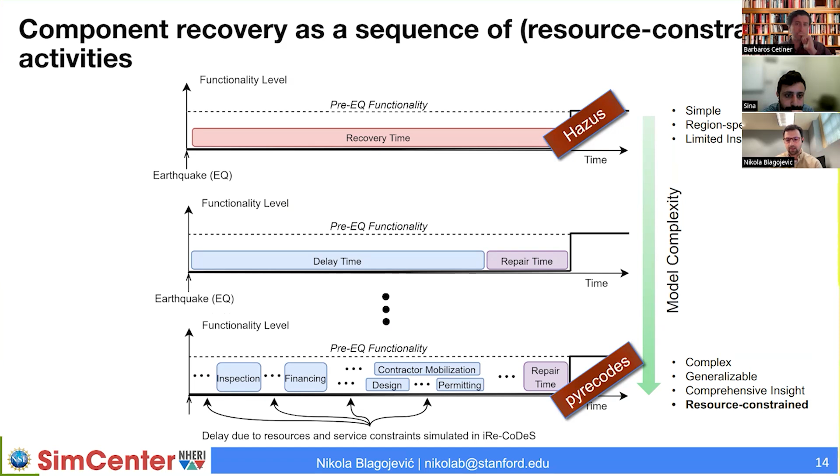All of these things can be done in pyrecodes, which is a software for regional recovery simulation that's written in Python, and it's also open source. I also want to mention that pyrecodes can also handle Hazus type recovery models.

The first thing that we're going to do within one time step is to update component state. What this means is that we're going to look at the component, let's say a substation, and we'll ask ourselves, based on the current state of damage, what can this substation provide to the community, and what are the resources that this component needs to operate and to recover? Once we understand this in this first time step, for all the components coming from different systems, we move on to the next step. The next step is where we capture interdependencies.

We do this by distributing resources among components. And if the component's operation demand is not met, we reduce components' capability to provide supply to other components, which might result in cascading effects, which we can also capture in pyrecodes. Apart from operation demand, we're also looking at the recovery demand, and we are trying to understand if the current supply of resources can meet the recovery demand of the component. And then finally, in the third step, we recover these components conditioned on the resources which they obtained for their recovery. Once we finish with the recovery, we step out of this loop and we calculate resilience.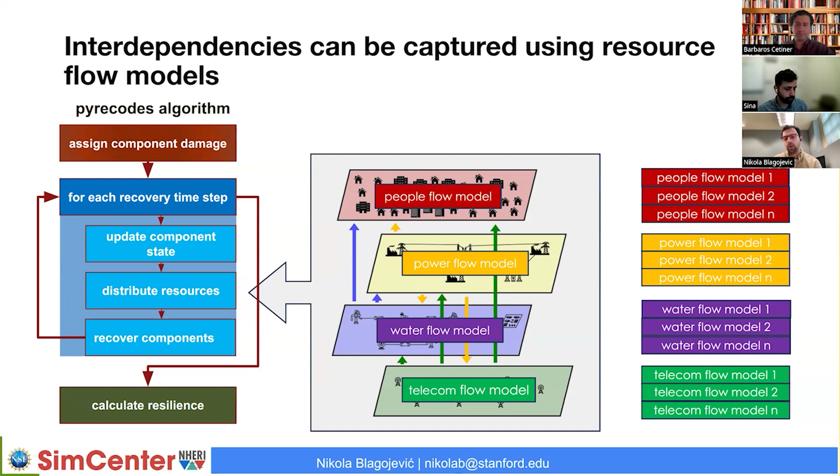Next slide, please. But for each of these systems, there are very sophisticated models to simulate this flow. And although we tried our best to develop these flow models, we can never be as good as those models developed by researchers who have devoted their PhDs or a lot of their time to developing these models. So what we wanted to do is to provide a flexible way of integrating these advanced flow models into this original system of interdependent systems model.

Next slide, please. And to do that, we developed an API, which allows people to plug in their models independently of the other models which are used in the same system, allowing us to mix and match these models for different resources, depending on the data that we have access to or the computational power we have access to.

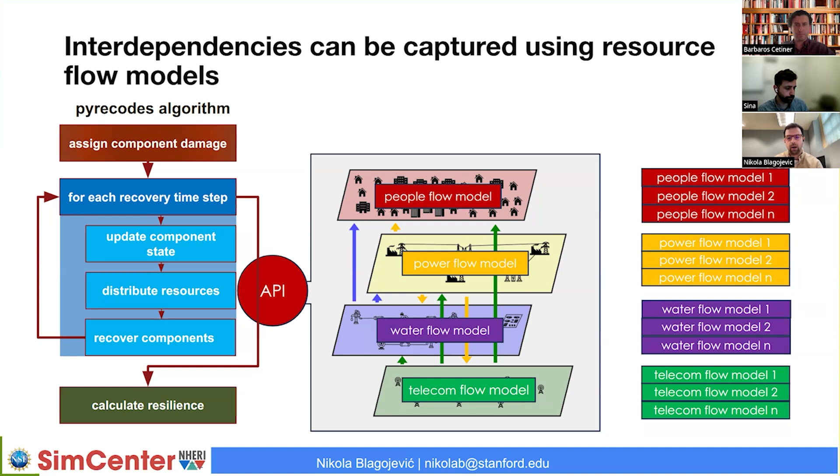Next slide, please. So the way that this API works is it has two parts. There is a model independent part, which we developed and will stay the same. So if you want to include your own flow model, you don't need to change anything about this first part. And then there's a second part called the model dependent part. This is where we need to write new code to integrate new flow models.

Next slide, please. So the way that this model independent part works is that first it takes the information from pyrecodes. It converts this information into a JSON file where for every component we have the supply that this component can provide and the operation and recovery demand of this component at this time step of recovery. Next, please. So then this model dependent part has to have a code which will translate this JSON file into model inputs for the flow model.

Next. Once the flow model ran and understood which components' demand can be met at this time step, there needs to be a script which will then transform this information into something that pyrecodes can digest, and that's the final part of the API.

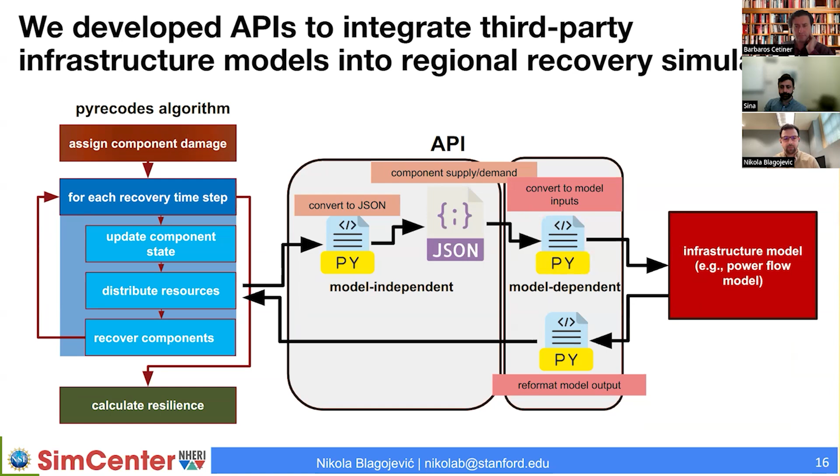Next. So we applied this to simulate the recovery of the water system, transportation, and buildings on the Alameda Island. Alameda Island is in the Bay Area, close to San Francisco. And on the left, you can see how this recovery looks. So what you can see here is that pyrecodes can simulate the recovery of different systems at the same time. So let's say you have your power flow model, but you don't have a recovery model for this system. pyrecodes can provide this recovery model for you.

Next. So what we're looking at now is how the housing demand and supply changes over time after this earthquake. So we have this initial drop. There is a certain delay time because repairs are usually preceded by certain delays. And then we see around day 200, we have a slow increase in housing supply. And this is because our buildings are now repaired and become functional again, allowing people to come back into the community.

Next. And so as we are simulating the change in the housing supply, we can also track the change in the water demand. And this is one aspect of interdependencies. So as you can see on the bottom graph, we see how the water demand dropped and then increased as the housing supply was increasing. So basically when people leave, we have less demand for water. As people come back, we have more demand for water.

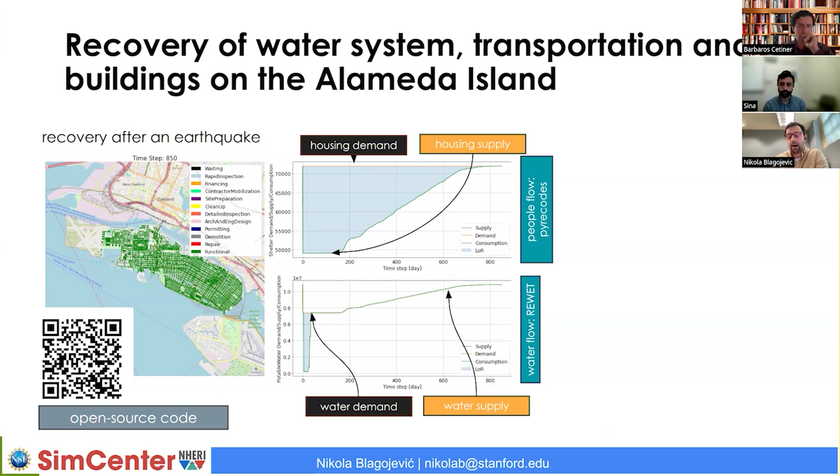And here we use an external flow model called REWET, which simulates water flow in damaged networks, which was integrated with pyrecodes through the API, which I just showed in the previous slide. And here you can see that this water flow model identified that in the first couple of weeks after this earthquake, we would have some unmet demand for water. So people that would stay in Alameda, they wouldn't get water in the first couple of weeks.

Next. What we can also do, we can also simulate what would happen with the traffic. So we have this interaction between people going out and coming back, and this will impact our demand for traffic. This will impact our origin destination matrices, which we capture in this model. But on the other hand, we also have the issue of damaged roads and bridges and tunnels, which we also capture. And so then we're looking at this interaction between the recovery of the demand and the recovery of the supply for traffic. And this allows us to capture how many canceled trips we would have over time as this community is recovering from this earthquake.

Transportation is also important because it allows us to capture access to repair. So if you have your power model and you would like to know whether repair crews can actually reach damaged components of the power model, we can provide you with that information because we are simulating how the traffic flows in these damaged networks. And so what we have right now, we have a very simple power flow model, and we will be happy to integrate a more advanced power flow model.

On the bottom left corner, you have a QR code which leads to the pyrecodes webpage. Example 5 is the example which you're seeing here. You can see all the code that we use. You can see all the information which we used. pyrecodes is integrated into R2D. So if you generate your damage from R2D and you have your inventory from BRAILS, you can immediately run the recovery in pyrecodes. Thanks.

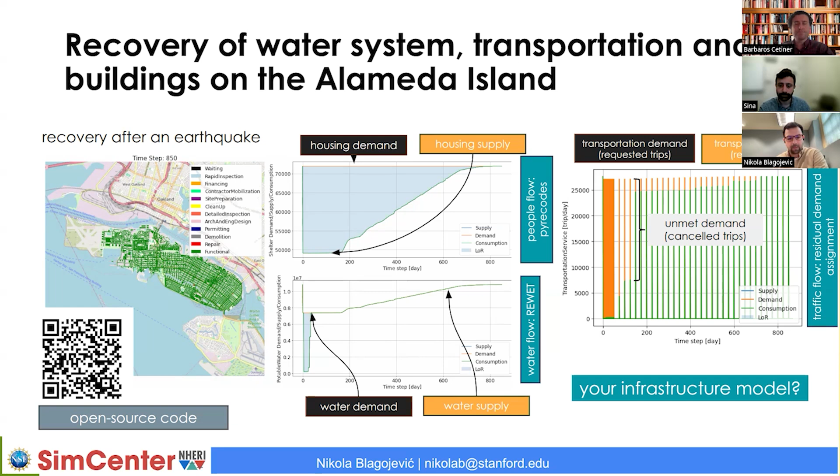So that was a summary of some of the existing capabilities in SimCenter tools. For the next minute or so, we'll focus on some of the upcoming features that are soon to be released. I'll focus on the main one for Brails++.

So I've mentioned Brails++ is currently capable of predicting where the power lines and a lot of the components for power networks are, based on the data scraped from public data sets. And it's also able to predict where transmission lines are from nighttime images of urban areas.

One feature that will be coming soon is we're going to use computer vision methods to predict additional attributes of the distribution system, or maybe transmission systems too, based on the feedback we get from the community. One idea is, for a lot of these transmission poles we don't really know the attributes, and there are no databases openly available for this purpose. And computer vision can be a great tool for this purpose.

Thank you, Barbaros. So another aspect of power network damage and loss is the damage and loss that can happen due to wind. And for that, there are possible ways that our presenters have discussed in detail before. We also have a tentative plan to include these damages due to wind for power networks as well. As you can see here, there is a structure for that, and that's our plan.